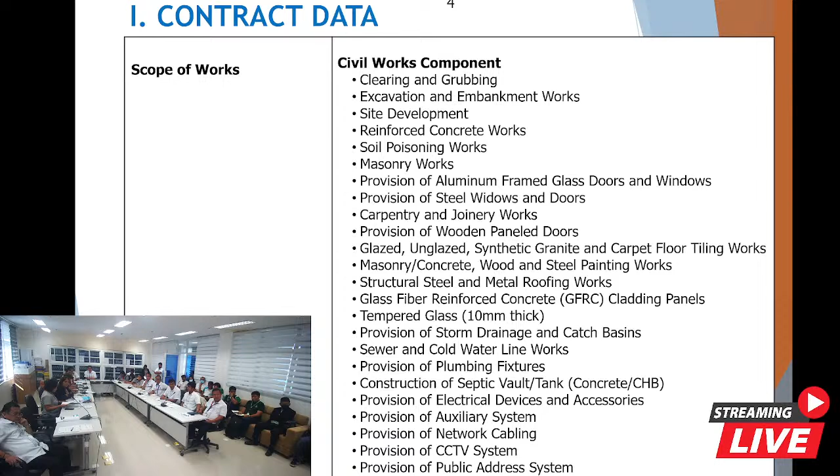Provision of plumbing fixtures, construction of septic vault or tank, concrete and CHB, provision of electrical devices and accessories, auxiliary system, network cabling, CCTV system, public address system, provision of door access and card reader system, generator, single or three-phase or standby, provision of grounding system, ventilating system, automatic fire sprinkler system, service elevator, and fire alarm system.

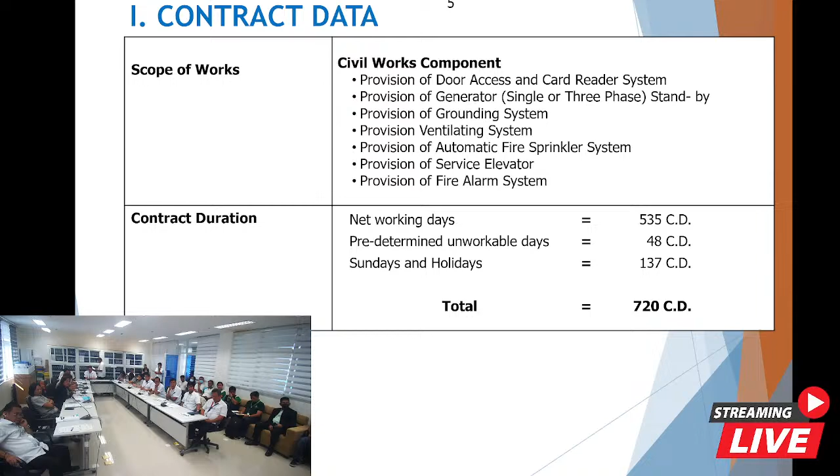The contract duration is 720 calendar days, inclusive of the net working days of 535 calendar days, predetermined unworkable days of 48 calendar days, and 137 calendar days for Sundays and holidays, for a total of 720 calendar days.

For the eligibility requirements, a PCAB license will be required with a price range of at least... For the single largest completed contract, bidders should have completed a contract on a major category of works with a construction cost of at least 50% of the ABC, which is 135,037,784 pesos and 69 centavos of the contract.

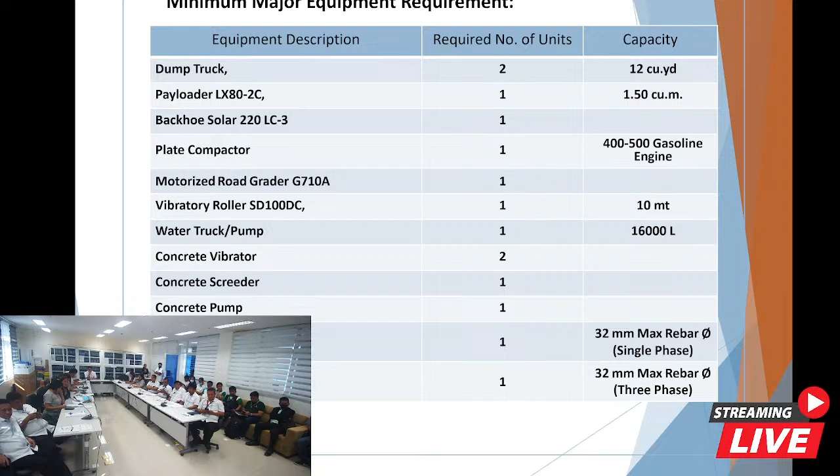One water truck or pump with a capacity of 16,000 liters, two concrete vibrators, one concrete screeder, one concrete pump, one bar cutter with a capacity of 32 mm maximum rebar diameter for single phase, and one bar bender with a capacity of 32 millimeter maximum rebar diameter for three phase.

One bagger mixer required with a capacity of 4 to 6 cubic feet per minute. One welding machine, gas or diesel driven, with a capacity of 300 amperes. One bagger mixer, one cutting outfit, one truck mounted crane with a capacity of 31 to 35 metric tons, and one truck mounted crane with a capacity of 21 to 25 metric tons. One portable grinder, two jackhammers, one air compressor, one electric gear drill, one generator set, 20 kVA.

Okay, all these materials testing equipment are in accordance with DO 11 series of 2017.

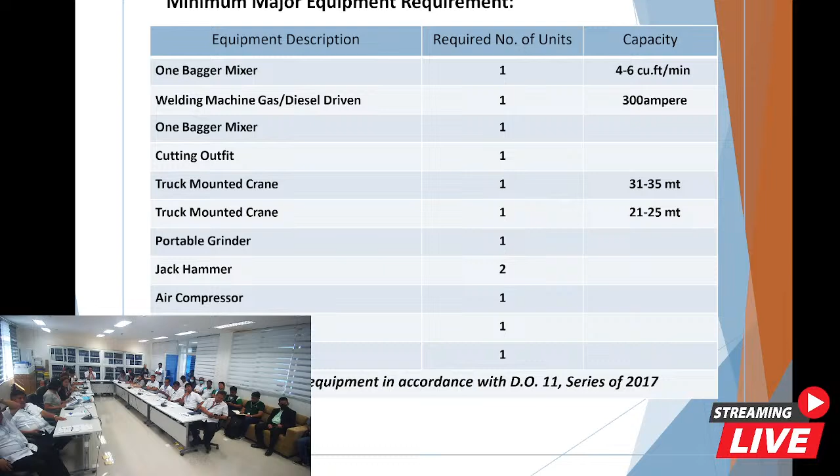Okay, so before we proceed to the requirements as per bidding documents, do you have any questions from the back, technical working group? From our prospective bidders, do you have any questions about what Ma'am Cecil presented, particularly regarding the requirements of manpower, equipment, and minimum work experience? Do you have any questions? To inform our prospective bidders that failure to comply with this, assuming this will be adopted without any change, is a ground for disqualification.

Any questions? Yes, sir? Sir, is joint venture allowed? Yes. So our question is, sir, do we allow joint venture for this particular contract? Yes, sir. Joint venture is allowed for as long as you comply with the requirements of joint venture.

Yes, sir. Just to clarify, sir, the joint venture between category AAA and category C, but category C has the allowed single largest project. Sir Larry, any comment on that?

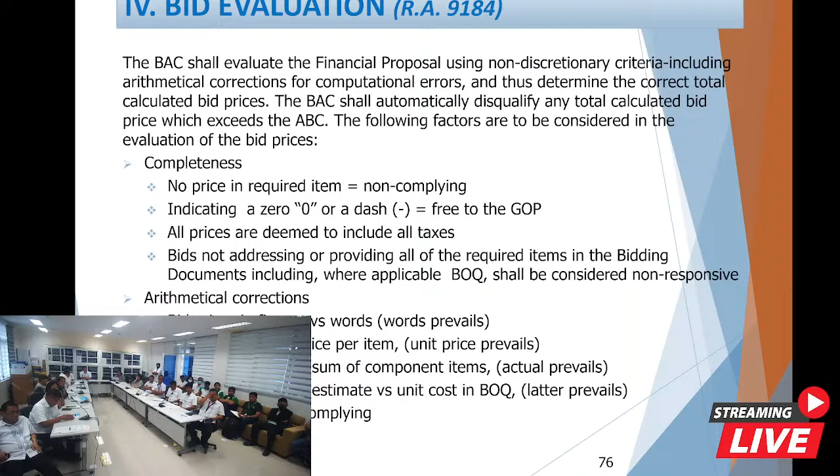During post-qualification, the legal requirements shall be verified, including licenses, certificates, and permits. It shall also be ascertained that the bidder is not included in the blacklist of contractors provided by the DPWH and the GPPB.

Other technical requirements shall be verified, including compliance of the single largest completed contract similar to the contract being procured, the competence and experience of key personnel to be assigned to the project, and the availability of major equipment units pledged to the project. Failure of the prospective bidder to state a complete technical description of pledged equipment and its specific location, whether owned, leased, or under purchase agreement, shall result in the bidder's automatic post-disqualification for award of contract and forfeiture of its bid security, per Department Order number 58, series of 2012.

The authenticity of the bid security shall also be verified, as well as the bidder's performance on its ongoing projects.

Grounds for disqualification include: negative slippage of at least 15% in a single contract; negative slippage of at least 10% in two or more contracts; failure of the contractor to commence repair works on ongoing contracts within the prescribed date after receipt of the procuring entity's notice of defects and deficiencies; failure to commence repair works on contracts with pending certificates of acceptance within the prescribed date after notice of defects and failures; substandard quality of work as per contract plans and specifications; unsatisfactory performance of contractual obligations at the time of inspection; currently imposed liquidated damages; and the results of the contractor's performance evaluation system.

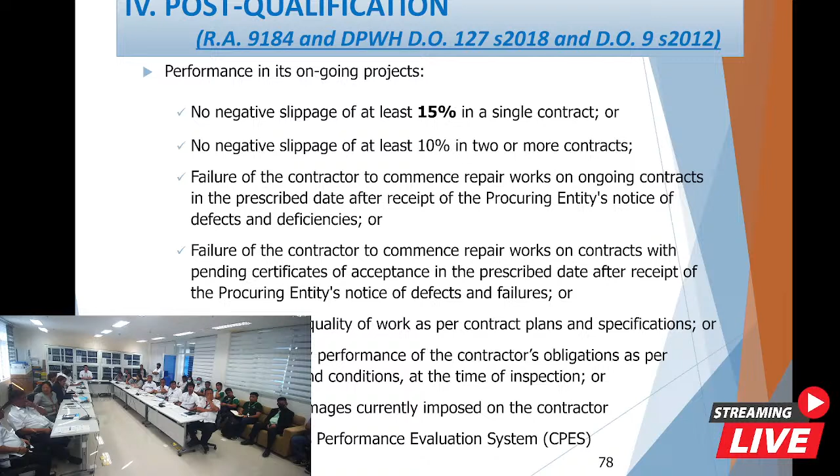So the technical working group or any authorized employee of the department will be conducting spot checks of this equipment, assuming you will be the lowest bidder. And in case one of the equipment is not present, that is ground for automatic disqualification.

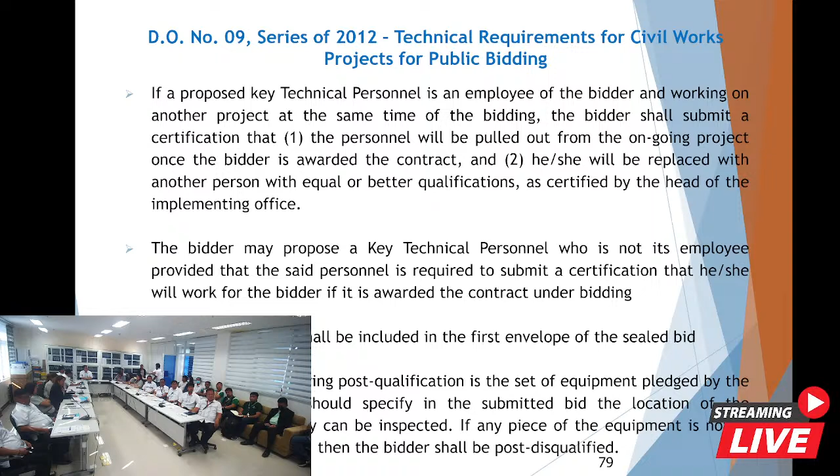Okay, no more questions. Members of the BAC and technical working group, do we have any more reminders, Ma'am Kim?

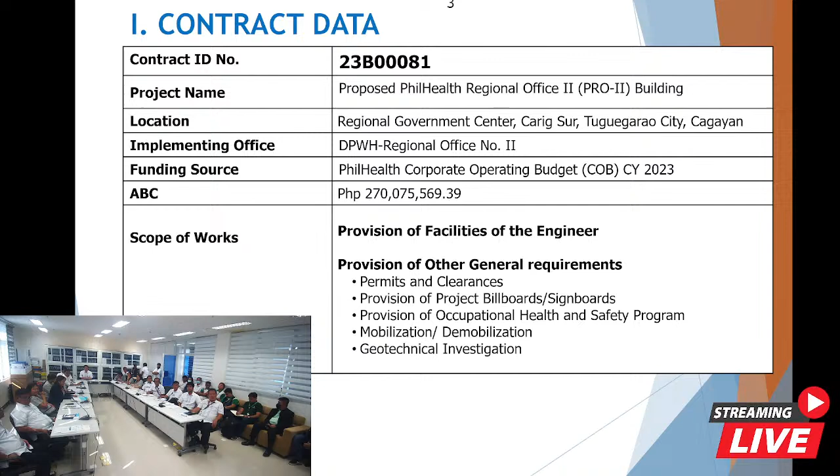Contract duration: 720 calendar days. This includes the pre-determined unworkable days. This is to inform our prospective bidders that we need to complete this project within this time frame.

So we have a deadline to meet, and definitely there's no problem with right of way. So we cannot use right of way problems as an excuse for not completing this project on time. Bad weather conditions are already accounted for in the unworkable days. So our target is to accomplish it within this particular number of calendar days.

Pertaining to the permits, I think we will be assisted by a representative from PhilHealth. And sir, Mr. Chair, the architect...

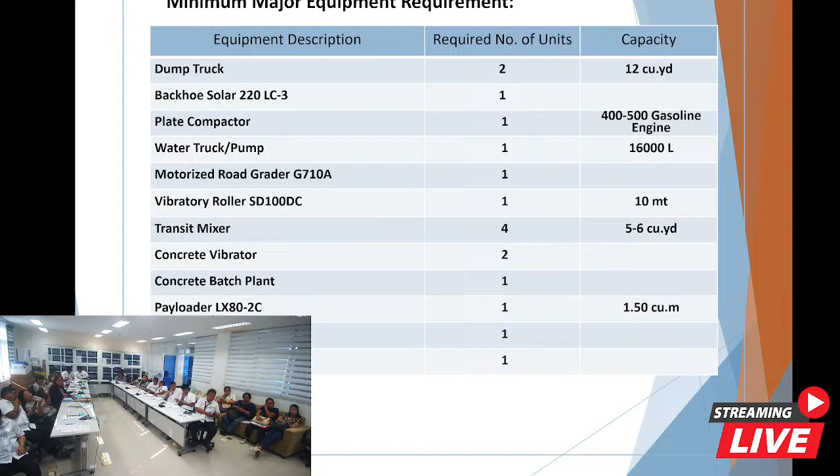For minimum major equipment requirement, we also need 1 bar cutter with 25mm maximum rebar diameter for single phase, and 1 joint sealer, gas or diesel driven, with hot or cold spray nozzle.

Also a bar bender with 32mm max rebar diameter, three phase, and 1 cargo/service truck with a capacity of 9 to 10 metric tons; 1 one bagger mixer with a capacity of 4 to 6 cubic feet per minute; 1 cargo/service truck with a capacity of 2 to 5 metric tons; 1 applicator machine; and 1 kneading machine. These materials equipment should be in accordance with DO 11 Series of 2017.

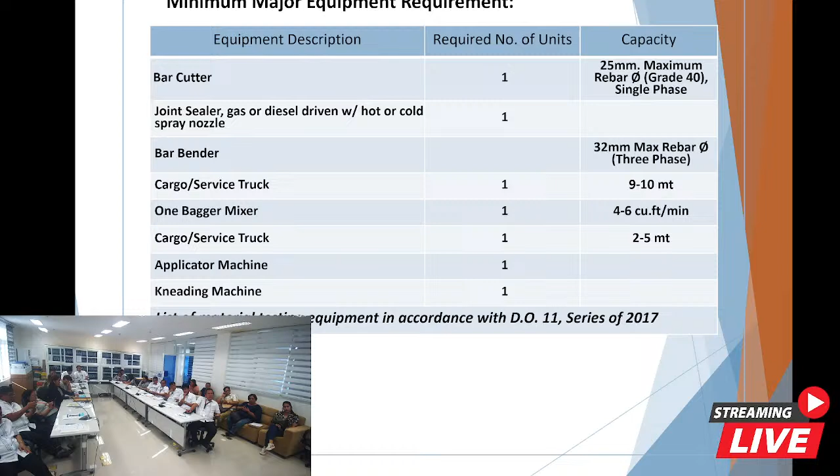Mr. Chair, that's all for 20B, please proceed to 001. Okay, any question? Mr. Bernard, prospective bidders? No question? Okay.

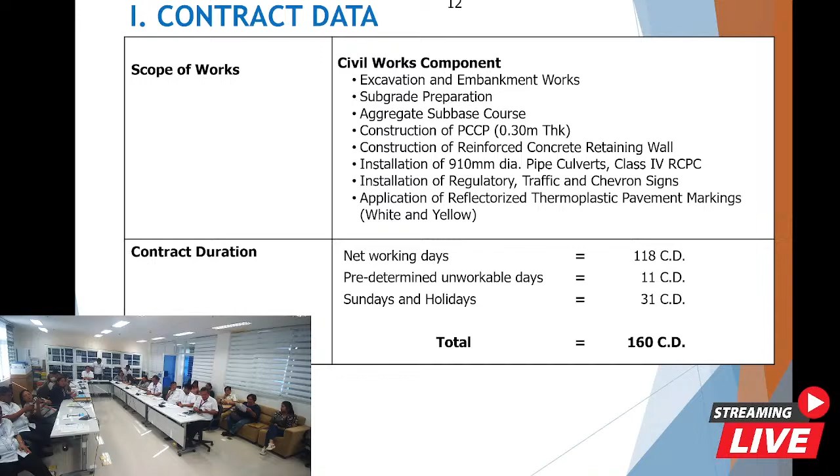Sir, I'm going back to the scope of work. You can see here the installation of regulatory, traffic, and chevron signs. It's already in our plan, indicated there in the plan specification, the class of regulatory road signs we will install. This is the aluminum type that should be installed, with reflectorized sheeting of a certain thickness. Then for the application of reflectorized thermoplastic pavement marking, white and yellow...

There was a finding by the PQS during our last coordination meeting that what they're seeing is that we're just using plain paint without the glass beads, meaning it's not reflectorized — just plain paint. So actually, in our specification, the mixture should be 0.5 kilo of glass beads to 1 liter of paint. That should be the mixture.

Okay, thank you, Ma'am Chief. Are there any other questions?

Sir, for clarification regarding the materials engineer, I think we have DO 111 Series of 2018 now, which supersedes — regarding assignment, the number of projects to be handled. So thank you, Sir Joel, for that. So we have the updated department order for materials engineer, so we might as well update our project requirements.

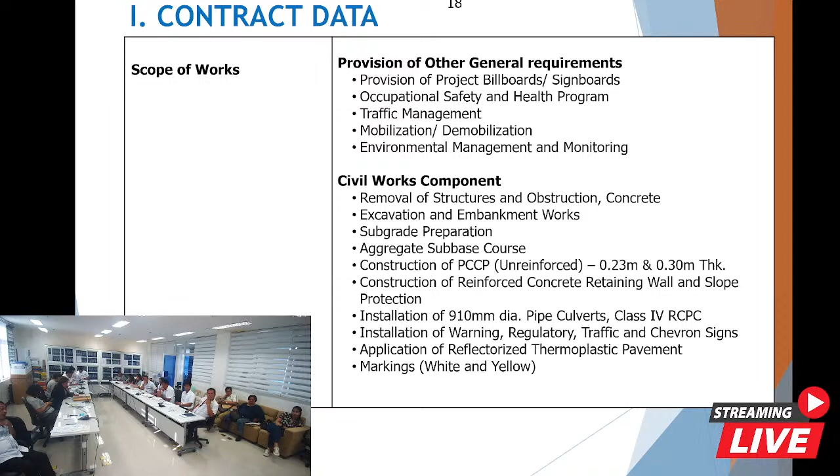For civil works component, we have removal of structures and obstructions, concrete and excavation works, subgrade preparation, aggregate subbase course, construction of PCCP unreinforced with thickness of 0.23 and 0.30 meters, construction of reinforced concrete retaining walls, slope protection, installation of 910 diameter pipe culverts class 4 RCPC, installation of warning and regulatory traffic and chevron signs, application of reflectorized thermoplastic pavement markings in white and yellow.

For contract duration, we have a total of 239 calendar days, with predetermined non-working days of 16 calendar days, Sundays and holidays of 44 calendar days, and working days of 179 calendar days.

For PCAB license, required PCAB license size range is medium. For SLCC, the bidder should have completed a contract under major category 4, taking the construction cost to present date, with an amount of 74,787,500 for the contract. For major category 4, we have RCC roads, construction of PCCP.

Similar categories of work: roads rehabilitation, PCCP, and road construction with PCCP. We have again a qualifier - the contractor must have completed a project with at least 2,100 cubic meters of concrete retaining wall. Project requirement: work experience requirements for key personnel. For project manager, at least 5 minimum years of total work experience in position and 3 minimum years of similar experience in position.

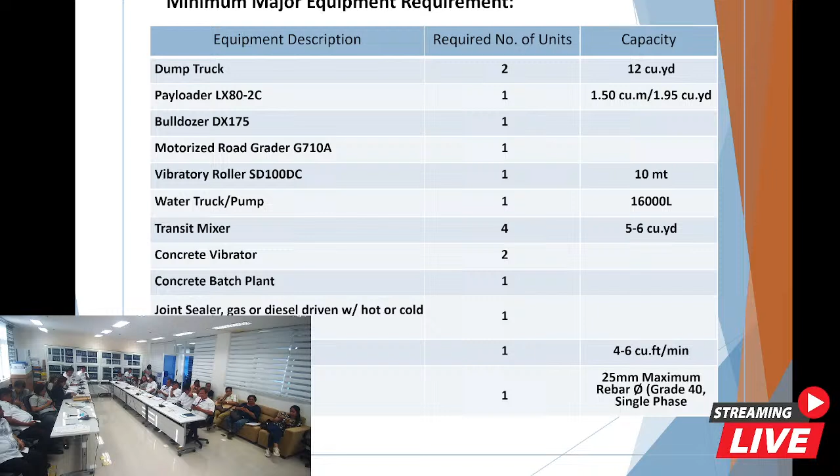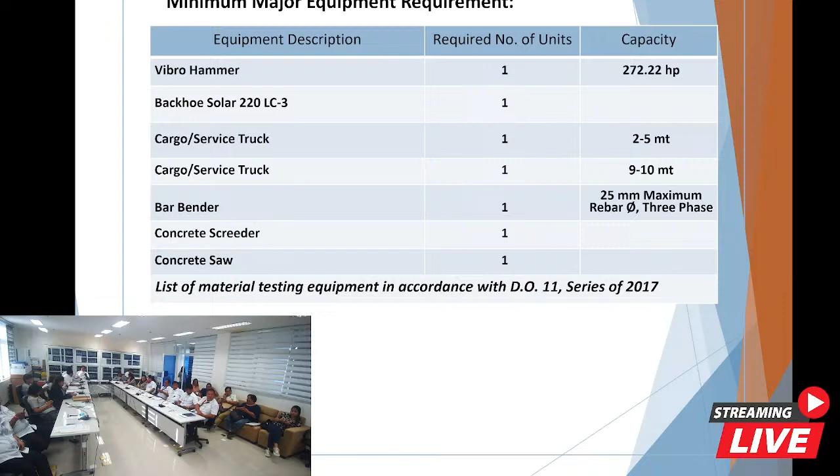For minimum major equipment requirement, one vibro hammer with a capacity of 272.22 horsepower, one backhoe Solar 220 LC-3, one cargo service truck with a capacity of 2 to 5 metric tons, one cargo service truck with a capacity of 9 to 10 metric tons, one bar bender 25 millimeter three-phase, and one concrete screeder.

Same qualifier? Yes, there's a clarification. Project ID number 1 just continuing, because the location is the same location and the class, sir.

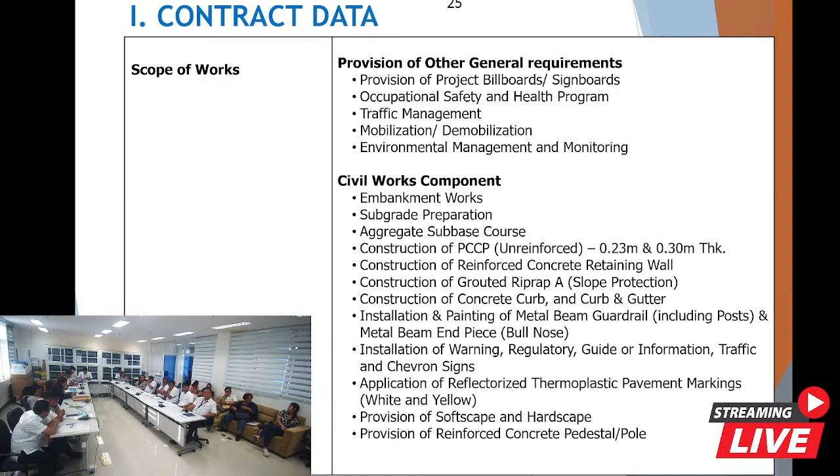Project engineer, 5 minimum years of total work experience, same position, 3 minimum years of similar experience, same position. The materials engineer should be accredited materials engineer 1. For quantity engineer, also surveyor, 3 minimum years of total work experience, same position, and 2 minimum years of similar experience, same position. For foreman, 5 minimum years of total work experience, same position, and 3 years of similar experience, same position. Safety officer should be accredited by DOLE. Control officer should have a certificate of training issued by EMB. Materials engineer must be in compliance with DO 98 series of 2016.

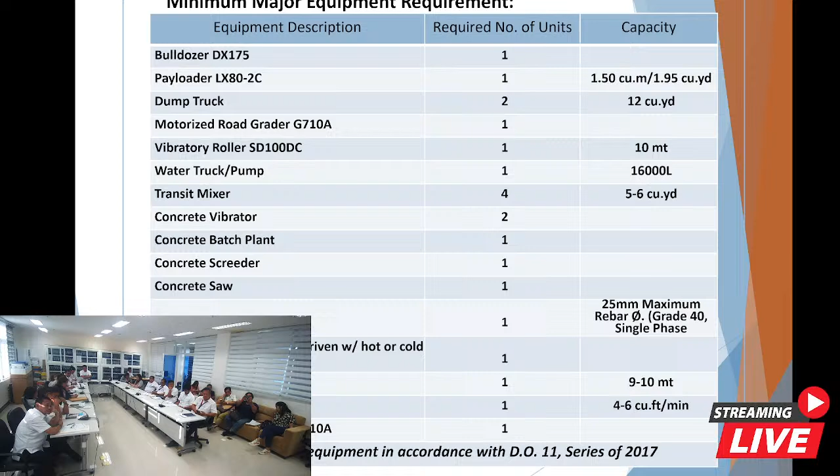Mr. Vice Chair, is that all for 24B?

Receiving comments, I think, for the amendments. Yes, sir, we will delete the models of each equipment, because as what our EMD chief said, we might be looking for that particular equipment when we conduct the equipment verification, and supposing they will show us that particular equipment, it will be a burden on their part. So much better for us to remove the model, provided the said equipment of the same model will be available. Okay, thank you, Mr. Max. Yes, sir.

Relative to the equipment, for example, we have the transit mixer. Now the requirement is 4 units of that 5 to 6 cubic yards. Now instead of 4 units, we have 3 units only of 9 to 10 cubic meters. Mas malaki yun, pero ang requirement is 4 of these small transit mixers. And for example, we have 3 of the big mixers, which is bigger in capacity, yung cumulative na yung total na mas malaki kasi diyan. Are you going to consider that 3 units of transit mixer in lieu of the 4? Okay, sir Max, as per requirement... requirement, kasi number lang yun naman natin.

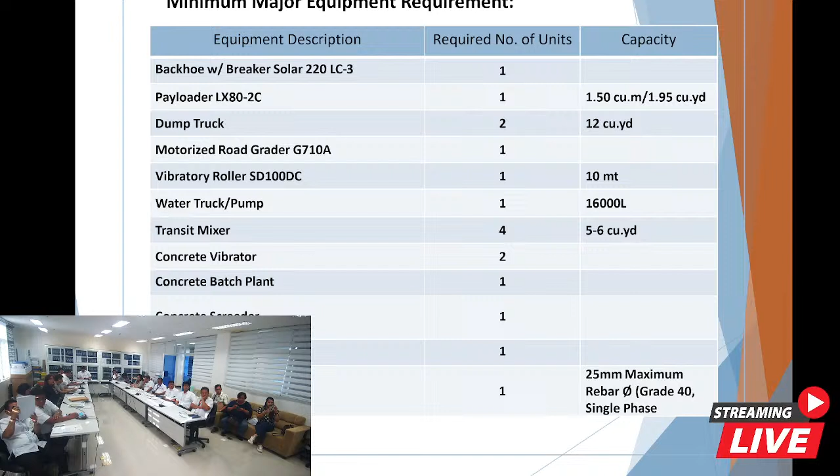4 transit mixer with a capacity of 5 to 6 cubic yard. 2 concrete vibrator. 1 concrete batch plant. 1 concrete screeder. 1 concrete saw. 1 bar cutter with a capacity of 25 millimeter maximum diameter for cutting of rebar. 1 joint sealer, gas or diesel driven with hot or cold spray nozzle.

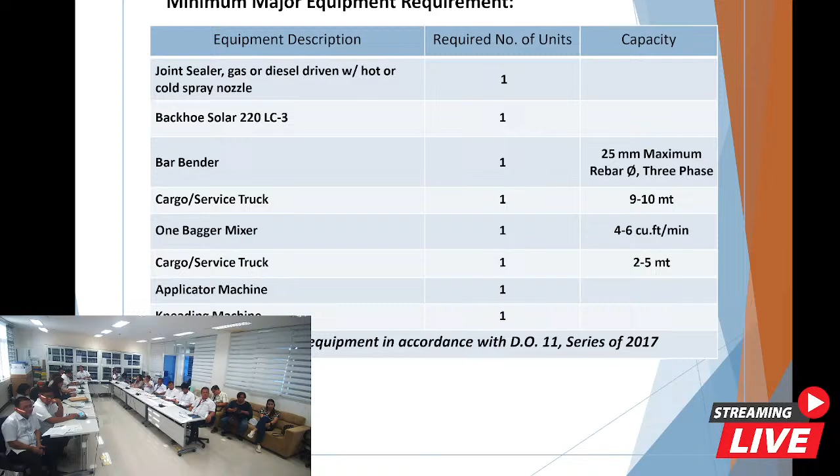1 backhoe. 1 bar bender with a capacity of 25mm maximum rebar diameter, 3 phase. 1 cargo service truck with a capacity of 9 to 10 metric tons. 1 one bagger mixer, 4 to 6 cubic feet per minute. 1 cargo service truck, 2 to 5 metric tons. 1 applicator machine. 1 kneading machine. This materials equipment in accordance with Department Order number 11, series of 2017.

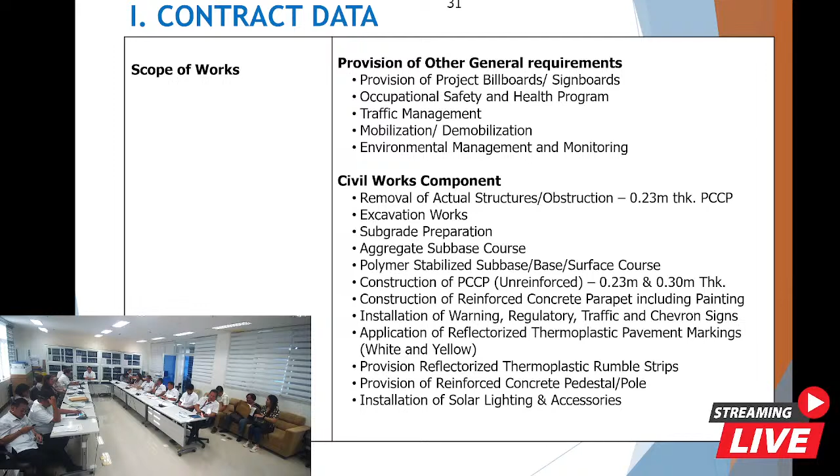Okay, so that will be taken up during project implementation. Okay, so that's noted by Sir Bernard and Sir Beno. Again, that's... Sir Bernard, please continue. Next project is contract ID number 24P0005.

provide provision of combined field office, laboratory, and living quarters building for the engineers on a rental basis. Provision of furniture, fixtures, equipment, appliances for the field office for the engineers. Operation and maintenance of temporary field office, laboratory, and living quarters building for the engineers. Provision of 4x2 pickup type service vehicle for the engineers on a rental basis. Operation and maintenance of 4x2 pickup type service vehicle for the engineers.

For other general requirements: provision of project billboards, signboards, occupational safety and health programs, traffic management, mobilization, demobilization, environmental management and monitoring. For civil work components: construction of footing columns for piers 3, 4, and 5; construction of footing for pier 7; foundation fill and lean concrete works at pier 3 and 4.

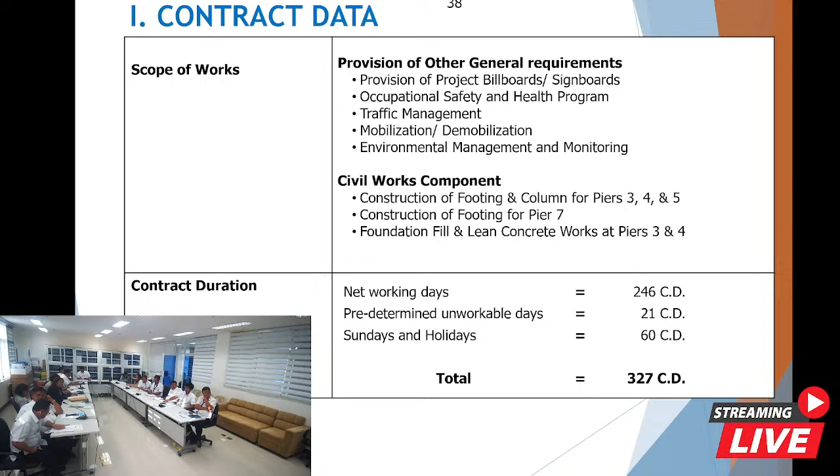The PCAB license requirement is at least medium A. For SLCC, bidder should have completed a contract on major category of works with a construction cost at least 50% of the ABC, with a total of 74,787,500 of the contract to be paid.

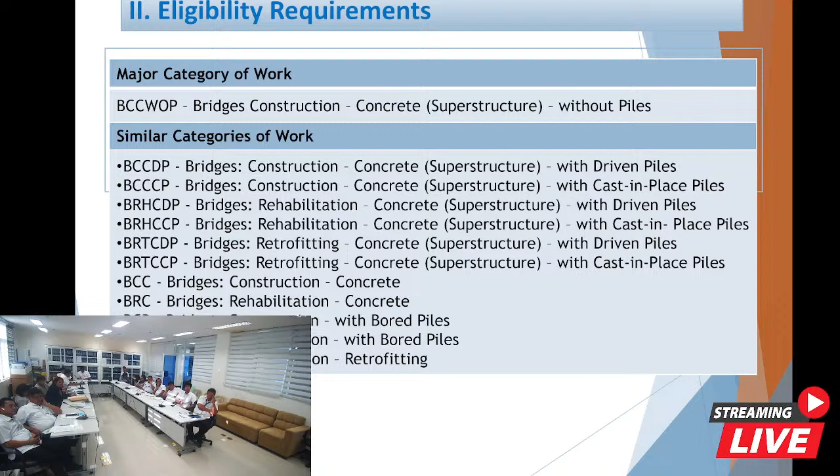Major category of work: bridge construction, concrete superstructure without piles. Similar categories of work: bridge construction, concrete superstructure with driven piles; bridge construction, concrete superstructure with cast-in-place piles; bridge rehabilitation, concrete superstructure with driven piles; bridge rehabilitation, concrete superstructure with cast-in-place piles; bridge retrofitting, concrete superstructure with driven piles; bridge retrofitting, concrete superstructure with cast-in-place piles; bridge construction concrete; bridge construction rehabilitation concrete; bridges construction with bored piles; bridges rehabilitation with bored piles; bridges rehabilitation retrofitting.

Work experience requirements for the key personnel. For project manager: 5 minimum years of total work experience and 3 minimum years of similar experience. For project engineer: 5 minimum years of total experience and 3 minimum years. For materials engineer: accredited materials engineer 1. Quantity engineer or surveyor: 3 minimum years of total work experience and 2 minimum years of similar experience. For foreman: 5 minimum years of total work experience and 3 minimum years of similar experience.

The safety officer must be accredited by the authority, and the pollution control officer must have a certificate of training issued by an EMB recognized organization. Note: the materials engineer assignment must be compliant to Department Order Number 98 Series of 2016, revised guidelines on the accreditation of contractor consultant.

The minimum major equipment requirements: 1 plate compactor, 1 water truck or pump with a capacity of 16,000 liters, 1 bar cutter with a capacity of 32mm maximum rebar size, rebar diameter single phase, 1 bar bender with a capacity of 32mm maximum rebar three phase, 1 cargo service truck 9 to 10 metric tons, 1 service crane, crawler crane with a capacity of 21 to 25 metric tons, 2 concrete vibrators, 1 crawler crane with bucket with a capacity of 36 to 40 metric tons, 1 bagger mixer 4 to 6 cubic foot per minute.

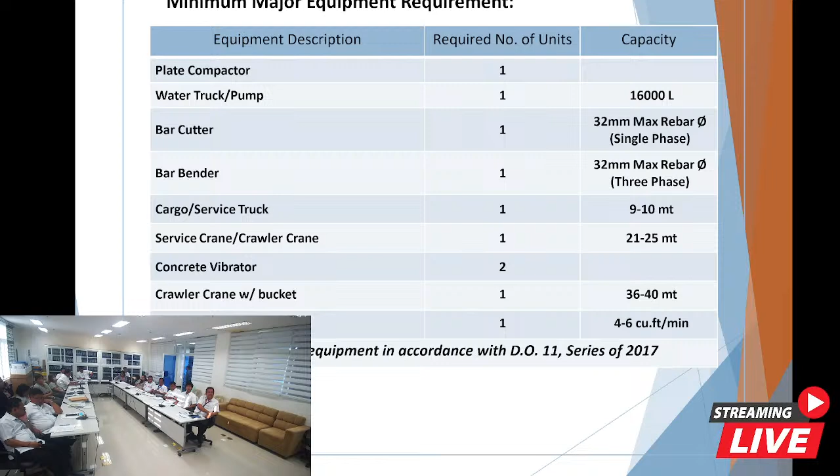List of material sensitive equipment is in accordance with Department Order Number 11 Series of 2017. That's all, 24P. Comment?

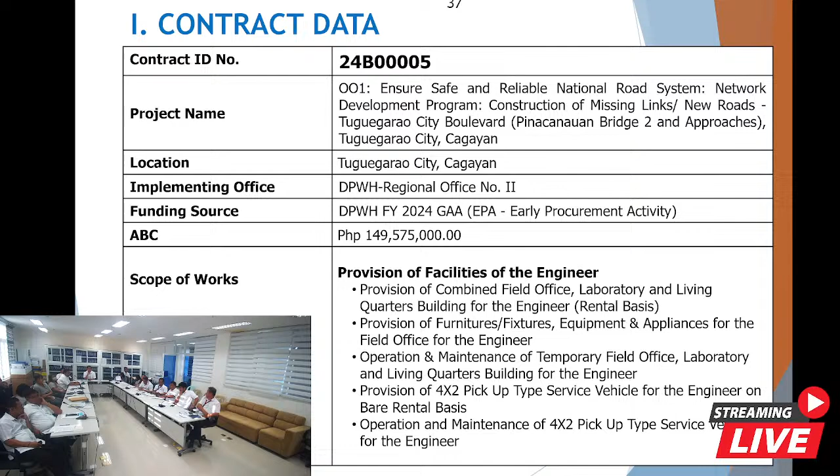The scope of work is provision of facilities for the engineer: combined field office, laboratory, living quarters building for the engineers on a rental basis; provision of furniture, fixtures, equipment and appliances for the field office for the engineer; operation and maintenance of the temporary field office, laboratory, and living quarters building for the engineer; provision of 4x2 pick-up type service vehicle for the engineer on a rental basis; and operation and maintenance of the 4x2 pick-up type service vehicle for the engineer.

Other general requirements: provision of project billboard/signboard, occupational safety and health program, traffic management, mobilization, demobilization, and environmental management and monitoring. For civil work components, is the removal of structures and obstruction.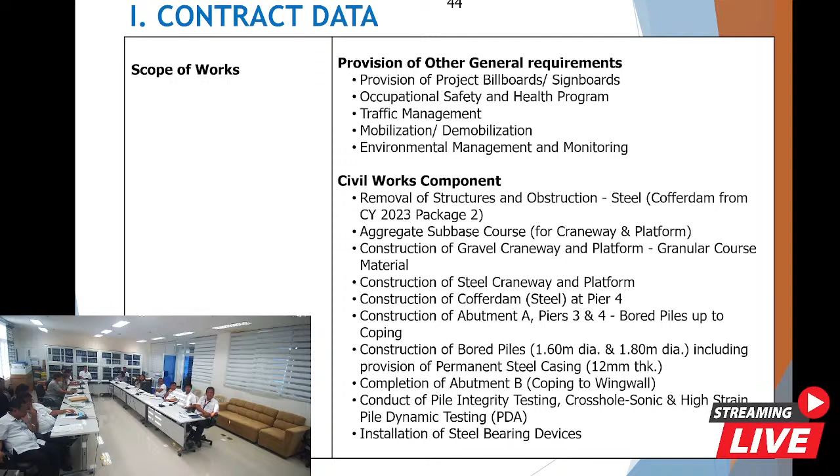Construction of cofferdam, steel at Pier 4. Construction of abutment A, Pier 3 and 4, bored piles up to coping. Construction of bored pile 1.6 meters diameter and 1.8 meters diameter, including provision of permanent steel casing, 12mm. Completion of abutment B, coping to wingwall. Conduct of pile integrity testing, cross-hole sonic logging and high strain pile dynamic testing, and installation of steel bearing devices.

The contract duration: for net working days is 272 calendar days, for predetermined unworkable days is 24 calendar days, and for Sundays and holidays is 70 calendar days, with a total of 366 calendar days.

The required PCAB license is at least Category A. For SLCC, bidders should have completed a contract on the major category of works with a construction cost of at least 50% of the ABC, amounting to 96,500,000 pesos only of the contract to be bid.

For the eligibility requirements, the category of works is bridges, construction of concrete superstructure with cast-in-place piles. For similar categories of work: rehabilitation of concrete superstructure with cast-in-place piles, retrofitting of concrete superstructure with cast-in-place piles, bridge construction with bored piles, rehabilitation with bored piles, rehabilitation concrete, construction concrete, rehabilitation and retrofitting. Qualified contractor must have completed a project with at least 1.8 meters diameter bored pile.

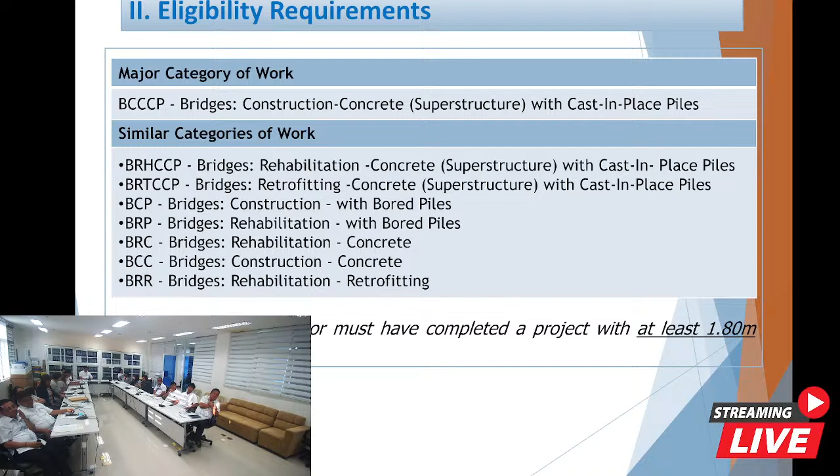Project requirements, work experience requirement for key personnel: for project manager, at least 3 minimum years of total work experience and 2 minimum years of similar experience. For project engineer, 5 minimum years of total work experience and 3 minimum years of similar experience.

The materials engineer should be at least an accredited materials engineer 2. The quantity engineer or surveyor must have a minimum of 3 years of total work experience and 2 minimum years of similar experience. For foreman, 5 minimum years of total work experience and 3 minimum years of similar experience.

The safety officer must be accredited by DOLE, and the pollution control officer must be certified, having a certificate of training issued by EMB or a recognized organization. The materials engineer assignment must be compliant with Department Order Number 698, series of 2016, revised guidelines on the accreditation of contractor construction materials.

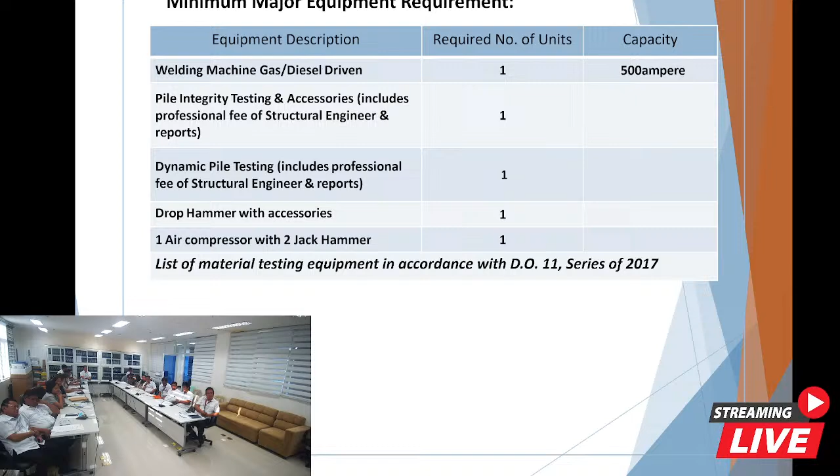This particular set of equipment is in accordance with Department Order Series, Department Order 11 Series of 2017. That's all, Vice Chair, for contract item number 2014.

Okay, walang comment. Exhausted na tayoata.

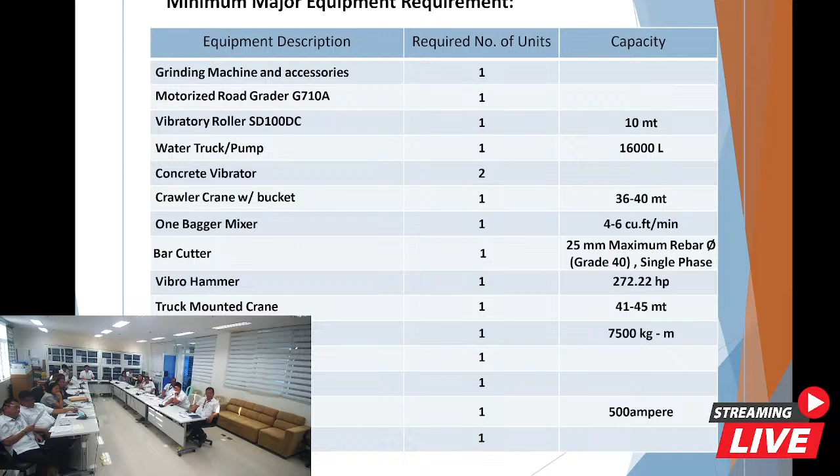Mr. Chair, maybe we could specify the capacity of the drilling rig, 1.6 diameter meter. So 1.2, particular na, drilling rig for use in the boring of the bored pile. Okay, capacity would be 1.6 meter to 1.8 meter diameter, okay natin. Based on the construction of the bored pile, so 1.8 diameter yan. Mark mo na lang, Mark.

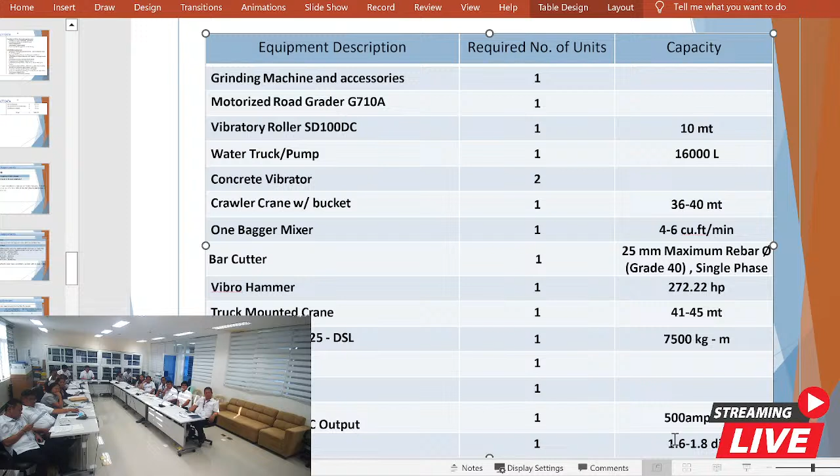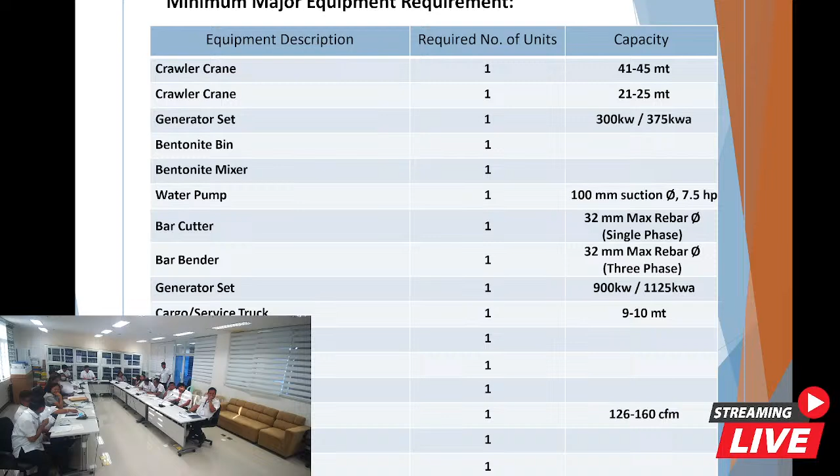Okay, so let's proceed to the last 3. Actually, last 3. So upon that, I did 4P0009, and then it will be presented by Ma'am Rose, and the last one, 4P0011, will be presented by Ma'am Chi.

Road sections: 80399 plus 008 to 80400 plus 009, 80405 plus 885 to 80406 plus 340, 80439 plus 000 to 80439 plus 557, 80444 plus 230 to 80447 plus 200, 80447 plus 720 to 80448 plus 76, 80411 plus 000 to 80452 plus 942.5.

Location is in Ilagan City, Cabagan, and San Pablo, Isabela. It is implemented by DPWH Regional Office Number 2, under DPWH FY 2024 GAA with an ABC of 213,424,225 pesos. For the scope of work: provision of facilities of the engineer, provision of combined field office, laboratory and

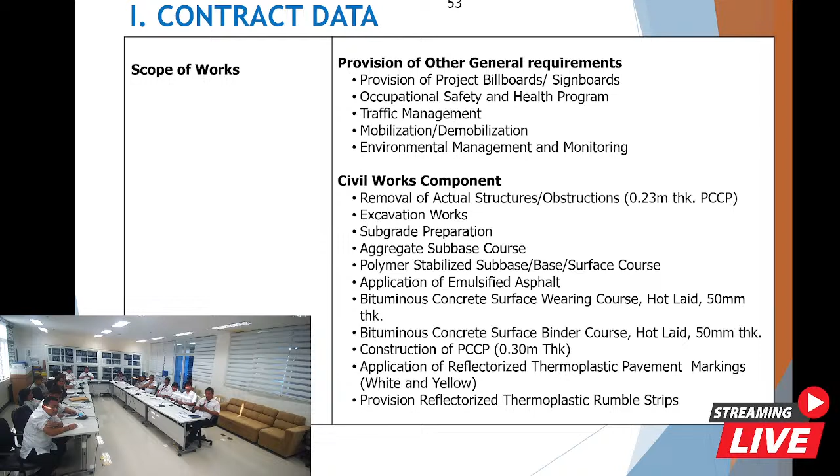For the civil works component, we have removal of actual structures/obstructions with a thickness of 0.23 meter PCCP, excavation works, subgrade preparation, aggregate subbase course, polymer stabilized subbase, base surface works, application of emulsified asphalt, bituminous concrete surface wearing course hot laid with thickness of 50mm, bituminous concrete surface binder course hot laid with a thickness of 50mm, construction of PCCP with a thickness of 0.30 meter, application of reflectorized thermoplastic pavement markings, white and yellow, provision of reflectorized thermoplastic rumble strips.

For the major category of work: roads, construction, asphalt. For similar categories of work: roads, rehabilitation, asphalt.

For the project requirements, work experience requirements for the key personnel. For project manager: 5 minimum years of total work experience, same position; 3 minimum years of similar experience, same position. For project engineer: 5 minimum years of total work experience, same position; 3 minimum years of similar experience, same position.

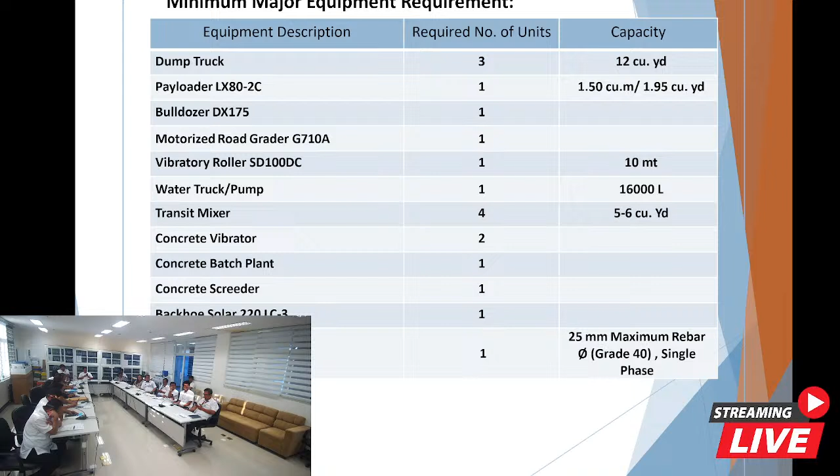For the minimum major equipment requirement: 3 dump trucks with 12 cubic yard capacity, 1 payloader LX80 2C with 1.5 cubic meter to 1.95 cubic yard capacity, 1 bulldozer, 1 motorized road grader, 1 vibratory roller with 10 metric ton capacity, 1 water truck or water pump with 16,000 liter capacity, 4 transit mixers with 5 to 6 cubic yard capacity, 2 concrete vibrators, 1 concrete batch plant, 1 concrete screeder, 1 backhoe solar, 1 bar cutter with 25mm maximum rebar diameter with 40 single phase capacity.

1 joint sealer, gas or diesel driven with hot or cold spray nozzle; 1 backhoe with breaker solar; 1 asphalt distributor with 5 ton capacity; 1 power broom; 1 asphalt paver; 1 pneumatic tire roller, 9 WHL, 9 by 20 4 PR capacity; 1 cargo service truck with 2 to 5 metric ton capacity; 1 applicator machine; 1 kneading machine. The list of material testing equipment must be in accordance with DO 11 series of 2017.

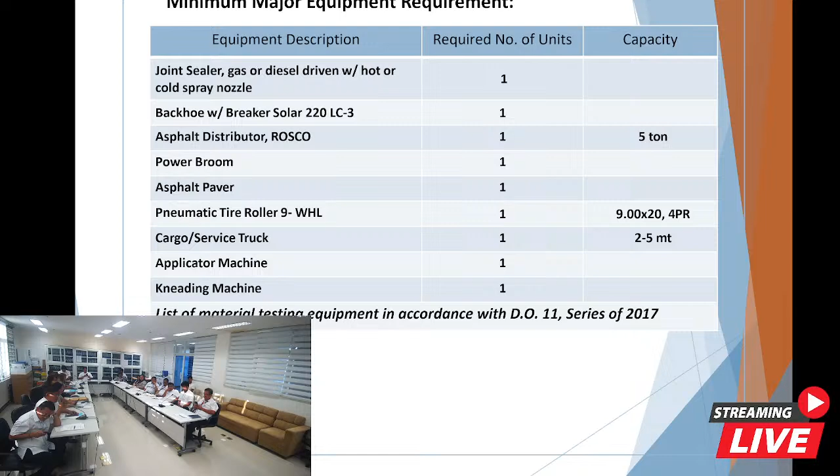That's all, Mr. Vice Chair, for contract ID 24-0009.

For contract ID number 24-0010, the project name is Ensure Safe and Reliable National Road System, Asset Preservation, Rehabilitation, Reconstruction, Upgrading of Damaged Paved Roads, Primary Roads, Daang Maharlika, K0395.931 to K0397.098, K0401.820 to K0402.160, K0408.008 to K0409.598, K0409.641 to K0409.853, located in Ilagan, Isabela.

The implementing office is the DPWH Regional Office number 2. For the funding source, it is under the FY 2024 GAA with an ABC of 144,750,000 pesos.

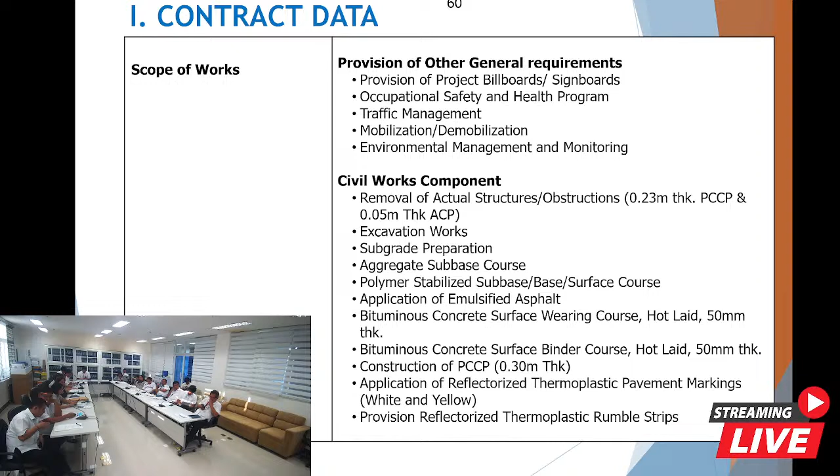For civil works components: removal of actual structures obstruction with thickness of 0.23 meter PCCP and a thickness of 0.05 meter ACP; excavation work, subgrade preparation, aggregate subbase course, polymer stabilized subbase base surface course, application of emulsified asphalt, bituminous concrete surface wearing course, hot laid with a thickness of 50 mm, bituminous concrete surface binder course, hot laid with a thickness of 50 mm, construction of PCCP with a thickness of 0.30 meter, application of reflectorized thermoplastic pavement marking, which is white and yellow, provision of reflectorized thermoplastic rumble strips.

For the contract duration, we have a net working days of 157, predetermined unworkable days 13, Sundays and holidays 38, for a total of 208 calendar days.

For the PCAB license, size range of at least medium A. For SLCC, bidders should have completed a contract of major category of work with a construction cost of at least 50% of the ABC, amounting to 72,375,000 of the contract to be bid. For the major category of work: roads construction, asphalt; similar categories of work: roads rehabilitation, asphalt.

For the project requirements, work experience requirements for the team personnel: project manager, 5 minimum years of total work experience in position, 3 minimum years of similar experience in position. For project engineer, 5 minimum years of total work experience in position, 3 minimum years of similar experience in position. For materials engineer, must be accredited materials engineer 1. For quantity engineer or surveyor, 3 minimum years of total work experience in position and 2 minimum years of similar experience in position. For foreman, 5 minimum years of total work experience in position and 3 minimum years of similar experience in position. For safety officer, must be accredited by DOLE.

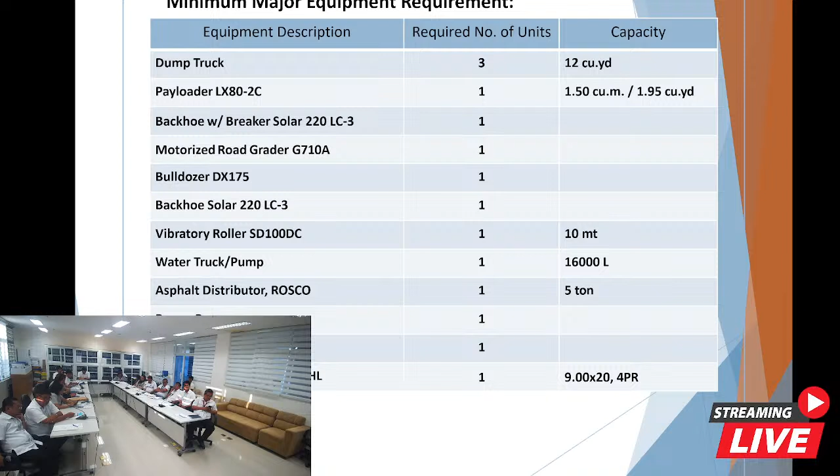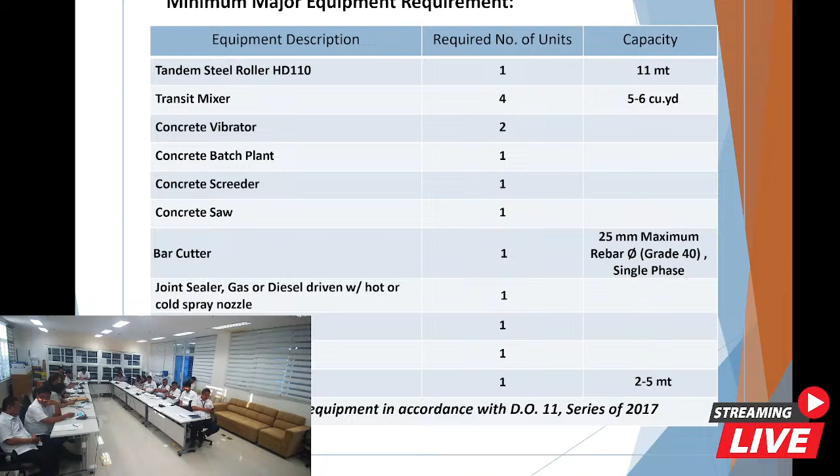1 tandem steel roller with 11 metric ton capacity, 4 transit mixer with 5 to 6 cubic yard capacity, 2 concrete vibrator, 1 concrete batch plant, 1 concrete screeder, 1 concrete saw, 1 bar cutter with 25 mm maximum rebar diameter with 40 single phase capacity, 1 joint sealer gas or diesel driven with hot or cold spray nozzle, 1 applicator machine, 1 kneading machine, 1 cargo or service truck with 2 to 5 ton capacity. The list of material testing equipment must be in accordance with DO 11 series of 2017.

That's all, Mr. Vice Chair, for contract ID 24B00010.

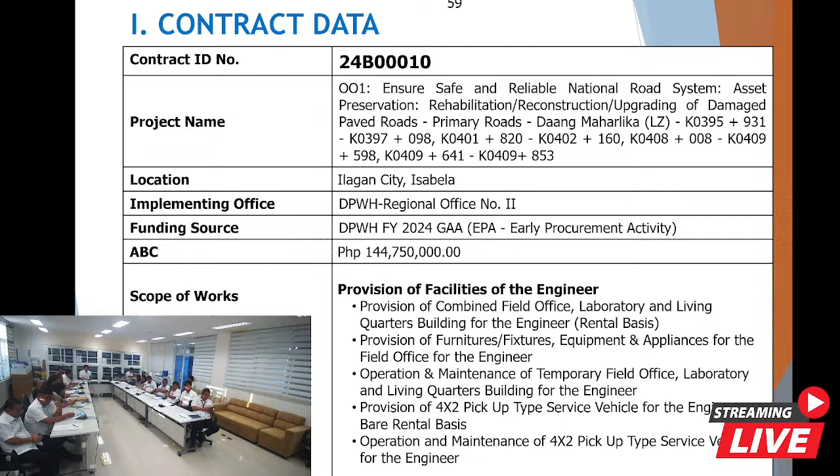Okay, so wala akong question. Hearing none, so we proceed to the last contract.

11,430,000. The scope of works are provision of facilities of the engineer, provision of progress photographs, provision of other general requirements are permits and clearances, provision of project billboard or signboard, mobilization and demobilization, geotechnical investigation.

For the civil works components, we have removal of structures and obstructions, excavation and embankment work, reinforced concrete work, soil poisoning work, masonry work, provision of aluminum frames, glass doors and windows, provision of wooden panel doors, glazed and synthetic granite tiling works, masonry, concrete and steel painting works, carpentry and joinery works, structural steel and metal roofing works, provision

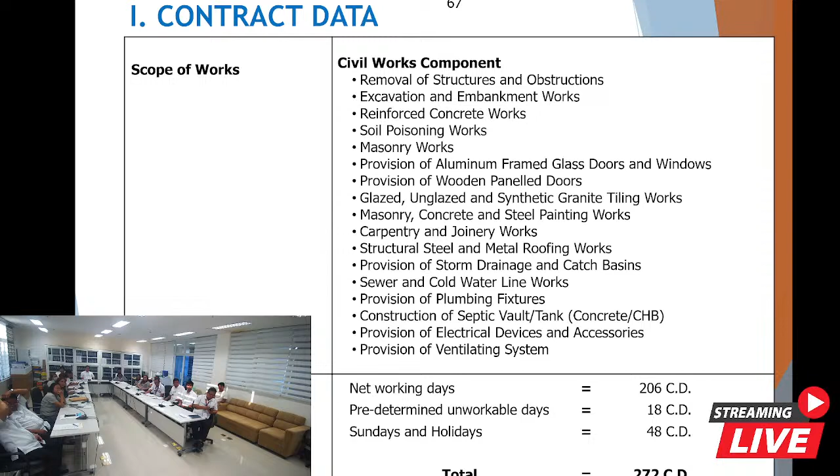For the required PCAB license, it's Small B, in case for the SLCC, bidders should have completed a contract on major category of work with the construction cost of at least 50% of the ABC, which is 5,715,000 of the contract.

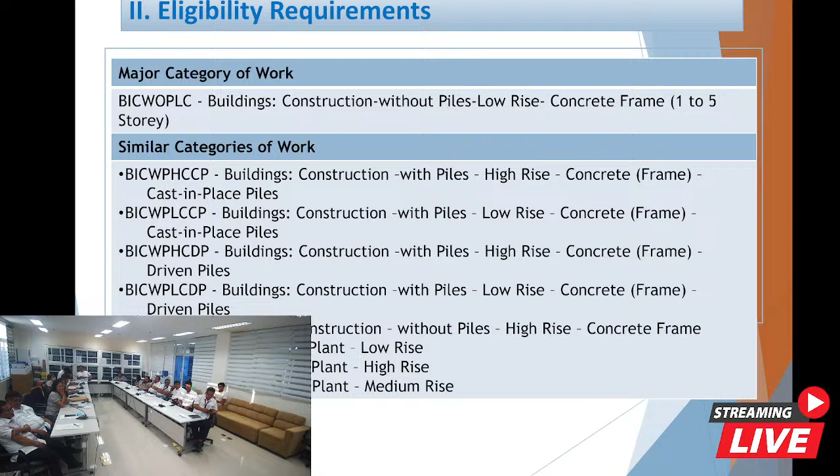As to the work experience requirement for key personnel: for project manager, must have 3 minimum years of total work experience, same position, 2 minimum years of similar experience, same position. For a project engineer, 3 minimum years of total work experience, same position, 2 minimum years of similar experience, same position. The materials engineer must be an accredited materials engineer, and his assignment must be compliant with DPWH 98 of 2016, revised guidelines on the accreditation of contractors, consultants, materials engineer.

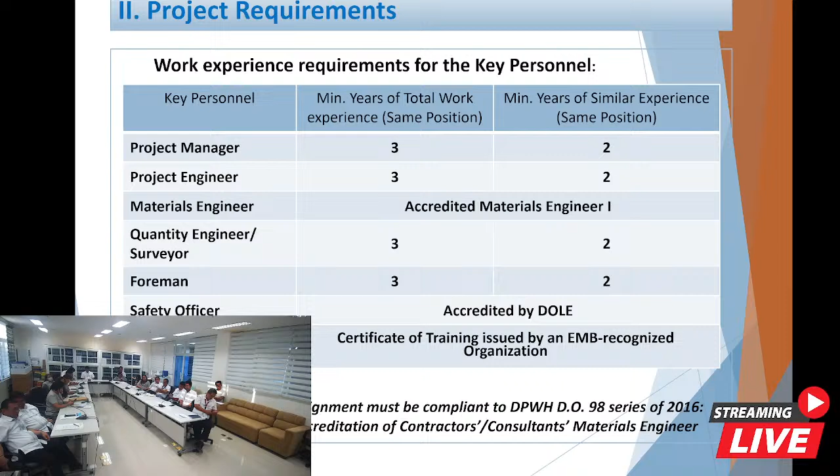For a quantity engineer or surveyor, must have at least 3 minimum years of total work experience, same position, 2 minimum years of similar experience, same position. Foreman must have at least 3 minimum years of total work experience, same position, and 2 minimum years of similar experience, same position. Safety officer must be accredited by DOLE, and the pollution control officer must have certificate of training issued by an EMB-recognized organization.

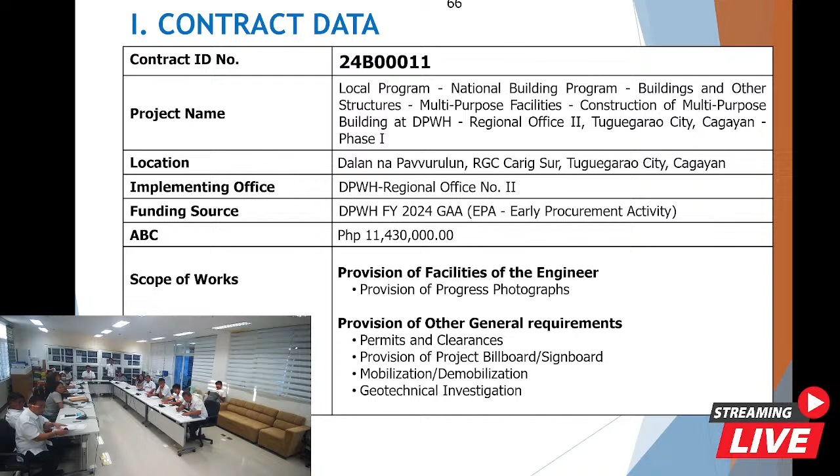Our technical working group is evaluating on that. Okay, so any other matters to discuss?

Okay, and the venue of submission would be at the Procurement Conference Room for the Regional Office 2, Extension Building 2, Regional Government Center, Carig Sur, Tuguegarao City, Cagayan. And for electronic submission, you can submit it at electronic-r2@dpwh.gov.ph. Okay? So, any other matters to discuss?